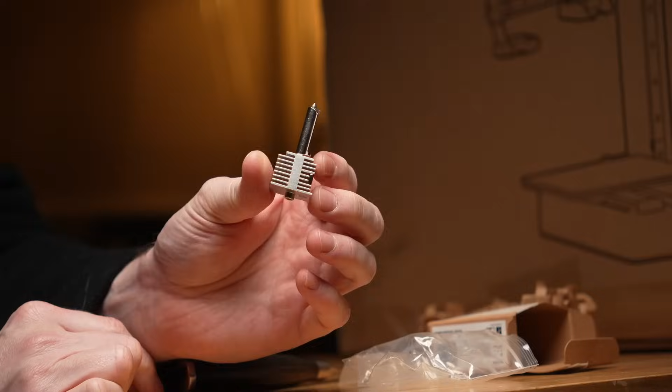All right, well, I finally got to try Bambu Lab 3D printers, and my friends, the hype is real. I'm just going to right off the bat say these printers are amazing. But they're not without some quirks. I have found a couple of things that are a bit weird or cumbersome, but we'll get to that. For the most part, though, this video is going to be an overwhelmingly glowing recommendation from me. These 3D printers are sick.

I just want to throw in here real quick, this video is a bit unusual. It's a first impressions video, but when I recorded it, my intention was to actually not do a first impressions video for these printers and to do sort of a project video, which I began work on and have procrastinated on a lot, if I'm honest. And it's quickly approaching the end of the month here, and I do want to get something out, so I figure we will do first impressions.

Largely the reason I've been procrastinating is because I've been really having a lot of fun doing FDM printing again with these printers, and I've found half a dozen projects around the studio to work on using them, so my time has been eaten up doing that, and I'll share some of those with you here in this video.

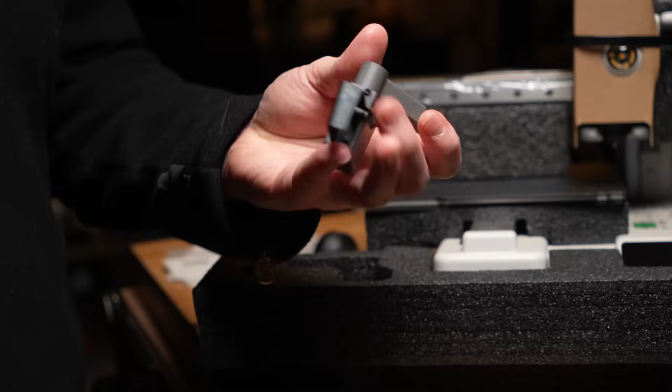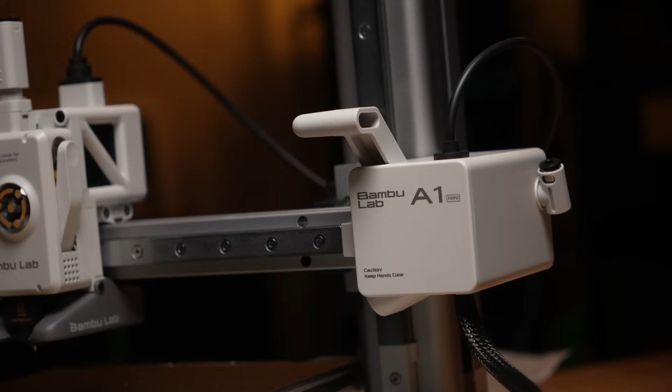All right, let's get into this. So I've got a few printers here. I've got the A1 Mini, and then I've got the A1 and AMS combo.

And for full disclosure purposes, the A1 Mini I bought with my own money. Well, kind of. I used the points system on MakerWorld, and I definitely had some help getting points to do that. So thank you everyone who downloaded some of my models on there, like the fume extraction and stuff like that. That helps me get the A1 Mini for a whole bunch cheaper, which is really cool.

Funny story, actually, the reason I did that is because I had tried to get in contact with Bambu Lab for the longest time, but I could never get through to anyone. So I ended up deciding like, okay, I'll just buy one myself. I don't mind doing that. And then I shit you not, like a week, maybe 2 weeks after I got that thing delivered to my house, an email pops in my inbox from a representative at Bambu Lab, and they were like, hey, we love your channel. We'd love to send you some stuff. And it's just like, you're shitting me.

But okay, cool. So the A1 AMS combo comes from Bambu Lab at no charge to the channel, as well as a stack of filaments. They sent me matte PLAs, they sent me tough PLAs, they sent me TPU, and they didn't send me any PETG, which is my fault. I should have asked for PETG because I actually need PETG for a thing that you'll see later in this video. But I did also buy some matte PLA filament from Bambu Lab as well myself. So it's a bit of a mixed bag.

And as always, I'm not afraid to offend or upset these companies and get ghosted by them. So if I have some criticisms, I'll of course share them with you, and I'll try not to let the fact that I got free shit influence me if I can help it.

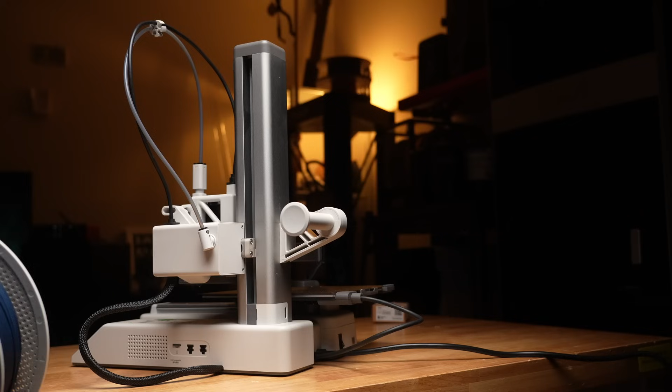So I began with the A1 Mini, getting that thing out of the box, and right away I was super impressed with how well the thing was packaged, and a little bit of assembly is required for all of these printers, but thankfully I didn't find any of it to be too cumbersome or complicated.

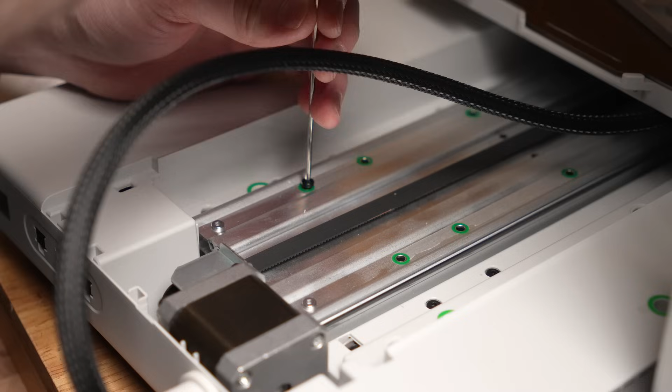But what really stood out to me was just how clearly and concisely Bambu Lab explain all of the different assembly steps. Like on the A1, for example, there's little green stickers that show you exactly where the screw needs to go. So I really enjoyed the documentation from Bambu Lab. I thought that was great.

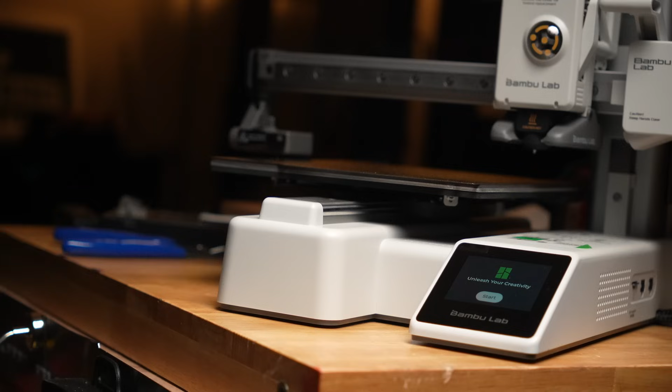And what's cool is that carries through to the software too. And the way I think I would describe it is it's kind of like Bambu Lab hold your hand the entire way. It's almost like they thought of every single possible way that you might fall over, and they've accounted for that. And they are just waiting there to take your hand and pick you up and help you overcome whatever roadblocks you might run into.

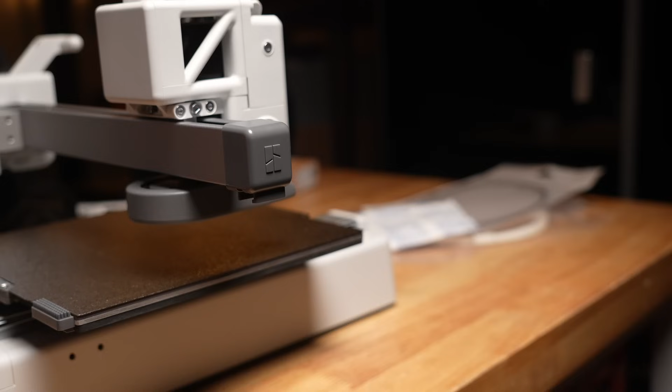There really was only one hiccup when it came to putting together the A1 Mini, and it was purely user error. I do apologize for what you're probably witnessing on screen right now, because this is a disgusting example of user error right here.

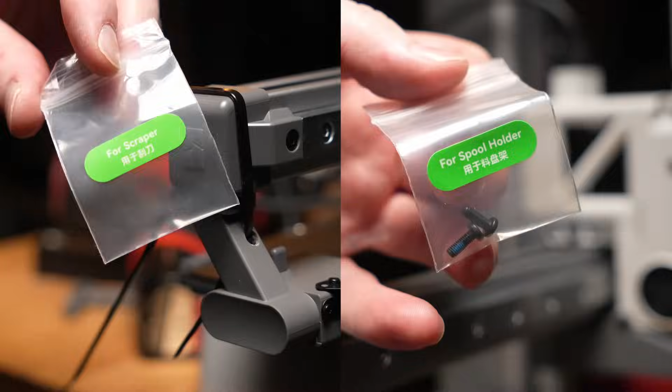In my little parts box there were 2 Ziploc baggies containing different sets of screws. I thought one of those was for this little wiper arm thing that helps purge filament, but the screw I thought was for this thing just wasn't reaching. I looked around making sure I wasn't missing any other screws, and it didn't seem like I was. So I thought I must have just been sent the wrong screw. I had a look through my collection of hardware and found a screw that I thought might work, but that wasn't working either.

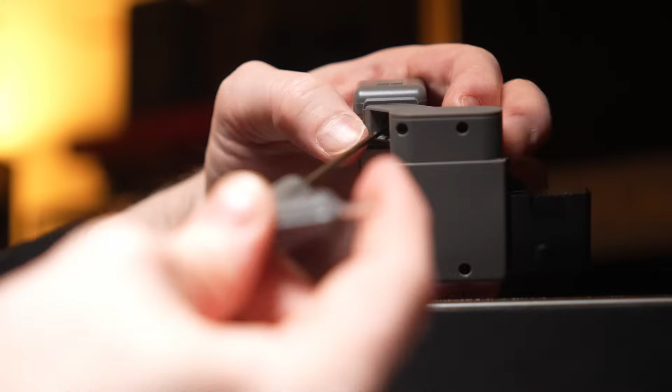I was starting to get frustrated, so please forgive me: I took a drill to this thing. My first thought was I'll just countersink it a little bit, hopefully that'll give enough depth for it to go all the way through. That didn't work. So at that point I was just like, fuck it, and I drilled all the way through the thing and put it on with zip ties.

I'm so sorry, I deserve all the hate for that. Oh, and sure enough, I found the fucking screw on the ground after I'd already done all this. It must have fallen out earlier on and I just missed it.

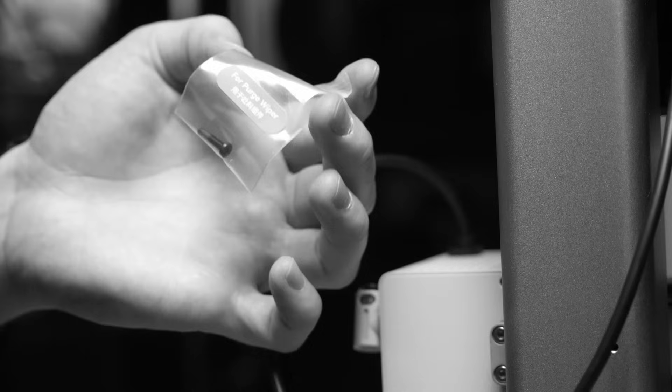So after getting the printer set up, the first thing you do is connect your MakerWorld account, which you can do through the Bambulab app. I've been using MakerWorld for a little while now, initially just to get those points so I could get a cheaper printer. But I've really fallen in love with it as a platform for sharing 3D files. The user experience is really nice, everything seems really well thought out on that website.

But there's one thing about it that always struck me as a bit odd, and I wasn't quite 100% sure what it was for: the community print profiles. It didn't really click until I had the Bambu app loaded on my phone in my hand and connected to an actual Bambulab 3D printer.

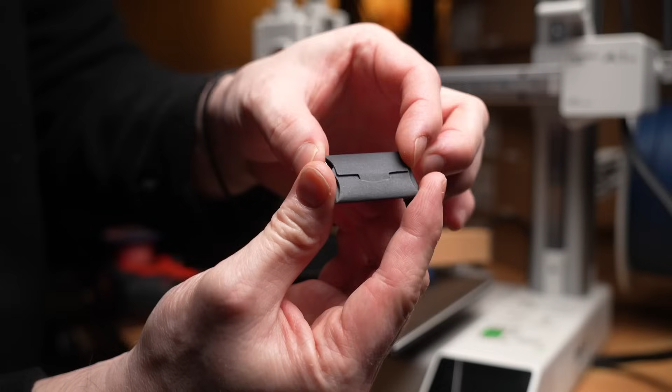The first thing I wanted to print was the scraper, because the Bambulab printers come with this little metal razor blade thing. It's not razor sharp but it's got a decent edge on it, and the idea is you print the handle. That's a fantastic idea for a first print, just to make sure everything is working, I thought. So I went on MakerWorld and typed in scraper, and found the official Bambulab one. And that's when I saw the print profiles, and then it clicked.

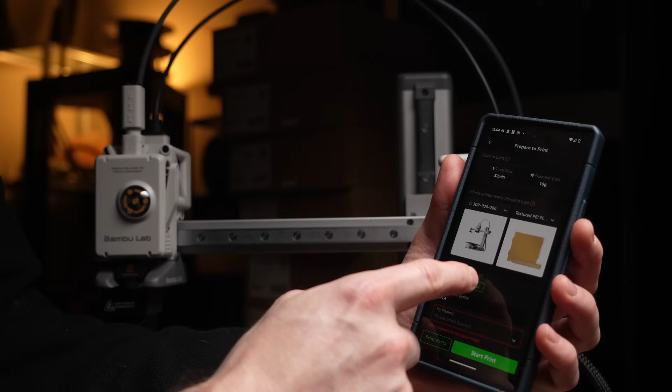I'm like, oh, right, okay, so here's other people who have sliced it up, and they've sliced it up how they want it. Some of them are multi-material, some single material, some have more walls, some have less walls, bottom layers, top layers, different infill settings, and they've shared that to this 3D file on MakerWorld. So as a Bambulab owner, you can just go through these print profiles that other people have shared, choose the one that suits you, and then basically just click print.

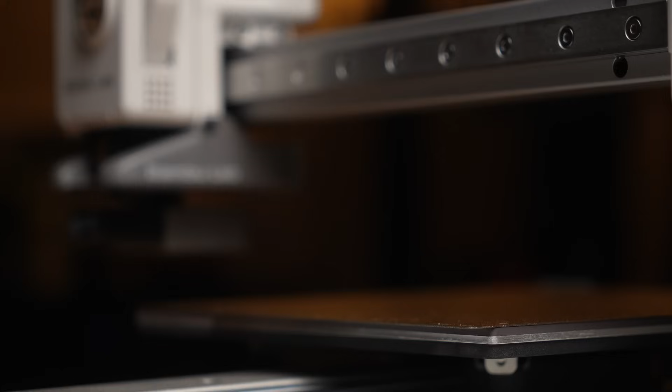It's kind of amazing, and I completely get it now, the whole print profiles thing. I mean, kind of dumb for not getting it, it's in the name, they're print profiles. But experiencing it and getting a feel for it and actually using it is game changing, I think.

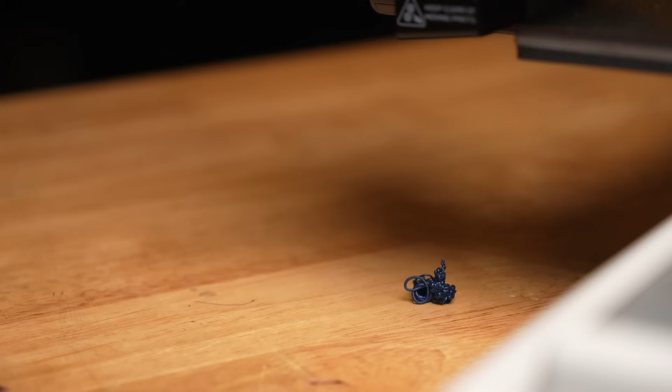From the perspective of someone totally new getting into FDM printing, to be able to just do that, not having to open a slicer on their computer and get potentially overwhelmed by all the settings and stuff, just on the mobile app, picking a thing, picking a print profile and hitting go, it's kind of nuts. So I picked a print profile that didn't use multi-material. I just wanted to get this thing done.

And I think it took about 45, maybe 50 minutes to print, and it's beautiful. The print quality is amazing. I did struggle a bit with the included screws to get it to attach, because the little securing bit on the back ended up delaminating as I tried to screw it in. So then I reprinted that.

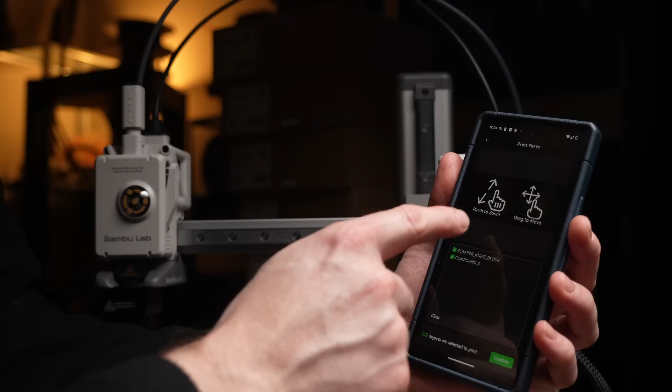Here's a great example of how they've literally thought of everything. I was thinking, okay, I want to print this again using the same community print profile, but I don't want to print the handle, just the little securing piece. I was super happy to see in the app there's a setting called parts, and you just click on that and deselect the parts you don't want and run the print again, which is what I did, and it worked.

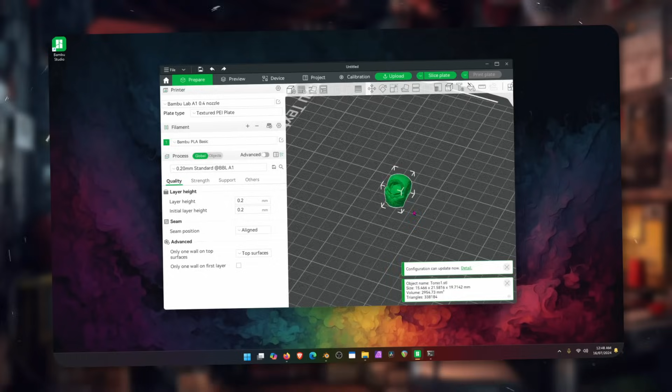So the next thing to talk about would be the slicer. I got to say, I'm really impressed with it. There's not really much to fault it for. Again, it has all this hand-holding built in, which is really great. For example, if you try and start a print and it's set to the wrong printer or wrong nozzle, it'll throw a warning at you. Or if you try to print something that's likely going to fail, it's pretty good at detecting that as well, and it'll say, hey, that's probably not going to work, which is quite good.

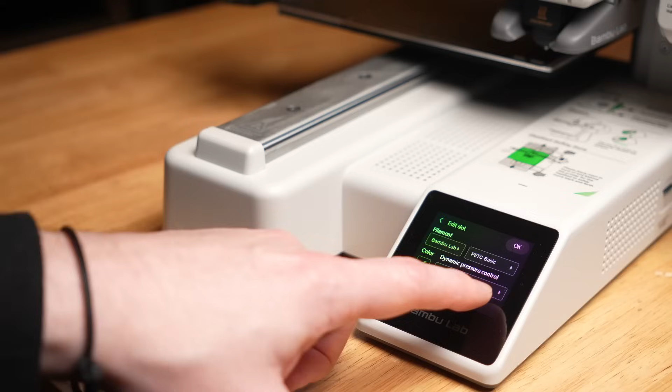But the really mind-blowing thing in the slicer, here's where I think Bambu Lab have really done something excellent, and resin manufacturers could really learn something here. On the printers themselves, when you load a filament, there's actually a bunch of presets built in, and you've of course got your Bambu Lab ones, which is great. So if you've bought Bambu Lab filament, their engineers have spent time creating profiles that work as good as humanly possible with these filaments.

That's amazing. If you want just a drag and drop experience with FDM 3D printing, you buy their filament, put it on their machine, tell the machine that's the filament you're using, and then the machine reports that, I believe, to the slicer. So the slicer knows what material you've got in there, and you just get great print results without having to calibrate settings or tune or know any of that. But what's really amazing is it's not locked down.

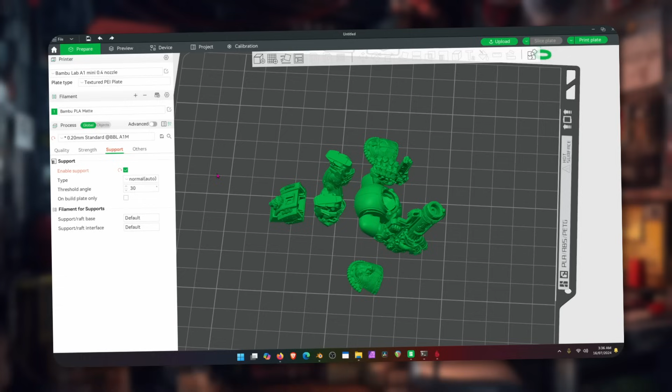You can see they've actually spent time to create profiles for other popular filament brands. This is amazing. eSun's in there, Poly something or other, there's a whole bunch, and that's incredible. Because I personally love eSun, I buy their filament all the time because I can get good deals on it here in Australia compared to all the other ones, at least. It's been a while since I've checked, maybe I should do that. But in any case, I love using eSun filament, and I love that this machine gives me the confidence to just pick the eSun filament I've bought, and then it does the rest.

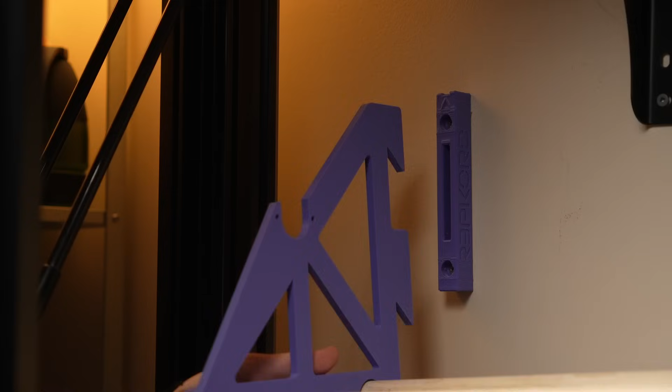Speaking of the print profiles, I've printed a bunch of different stuff. Like I said, I've done PLA, PLA Tough, TPU, and I even did some PETG - I ended up using eSun PETG. And yeah, the print quality on everything has been amazing.

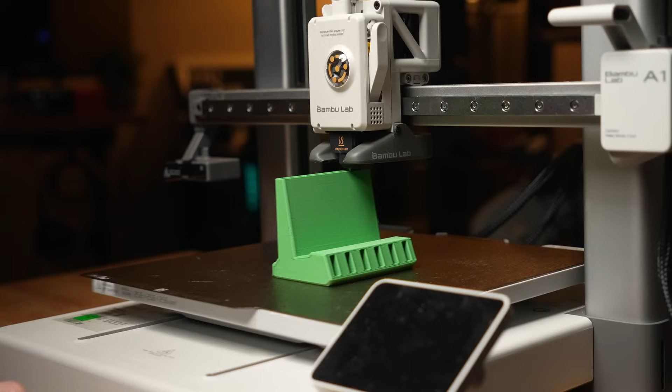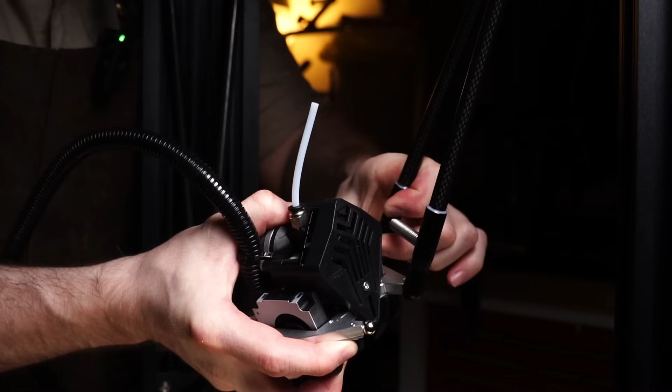And the print times as well aren't too bad. I've noticed, so there's this phone stand I wanted to print that has some USB slots in it, just a little bit of organization for my desk. Using the 0.28mm draft profile for PLA matte, I can actually do it half an hour quicker than my FLSUN V400, which has been my go-to daily driver, just absolutely favorite FDM printer these last however many months since I got it. I've absolutely just been smitten with the V400. It's so good, the print quality is amazing.

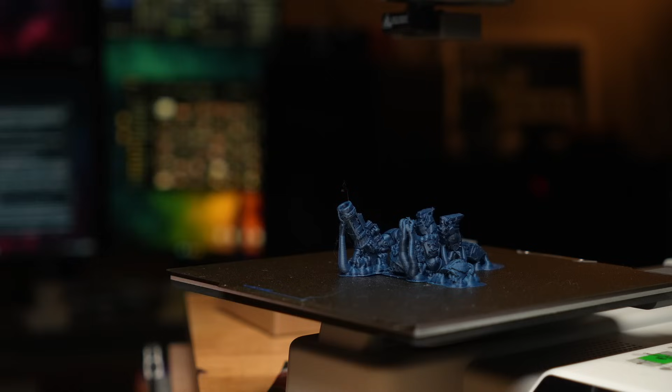It's just so fast. But then here comes this printer doing the exact same thing, and arguably in a more compact, fun size. I hate massive printers. Uniformation just came out with the details of their GK3, and I was so disappointed - like, no, not a big printer. That's just me, I always want smaller printers. I love smaller printers, just the user experience feels like it starts to exponentially get worse the bigger the printer gets. But anyway, thankfully that wasn't the case with the V400 - the V400 is sick. But here comes the A1, and it's the first printer that I feel like, ooh, I might have to kick the V400 now, and the A1 can take its spot because it's just so much more space efficient.

I may be giving these printers away to family. In fact, I think I will, because these are the first printers that I really feel confident giving away to family. That's because of the amount of hand-holding these machines have.

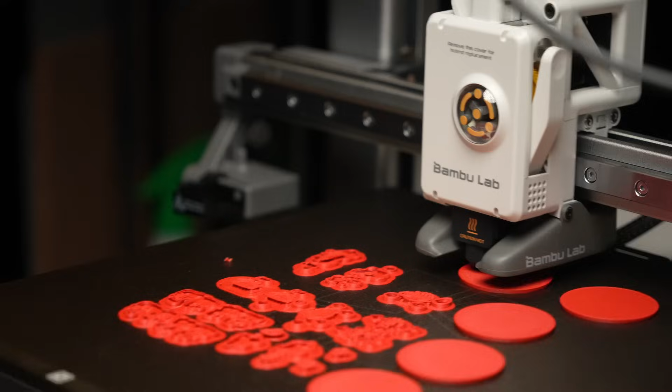These Bambu Lab products clearly haven't been built for people who want to know exactly what all the different settings and features of their 3D printer do. These products are very much more for the person who wants to do 3D printing but has zero interest in actually understanding how the thing works.

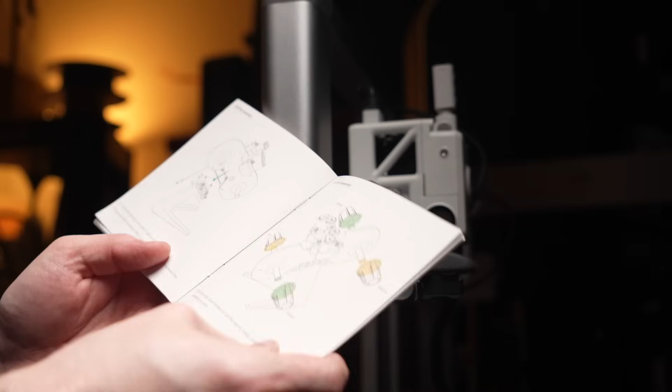I think that's such a great way to introduce people to 3D printing and to share 3D printing with others, especially in concert with that MakerWorld Bambu app. It's just amazing that they've done this.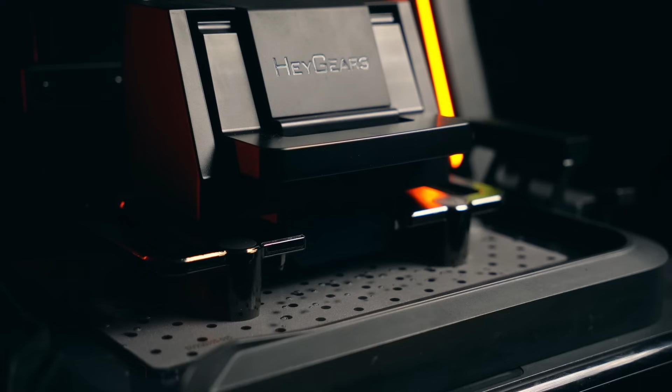They could have done what HeyGears did, and then this would be a completely different video. HeyGears kind of did this with resin printing, but they did it by locking you into their ecosystem. You've got to use HeyGears resin on the HeyGears machine and HeyGears slicer. It's all super locked down and very expensive, which really sucks, because that gives me all sorts of concerns.

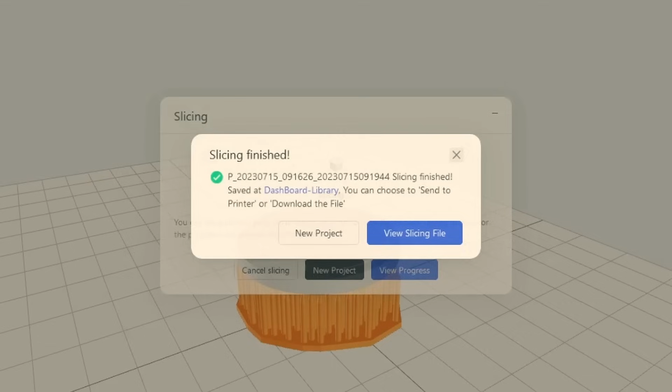Like what happens if their server goes down? Guess you can't use the slicer anymore. Or what happens if they stop shipping their resin to your country? Now you have to somehow get it some other way and it costs a fortune. Or what if they just stop producing the resin you like? Or change their minds about the pricing one day and increase it 400%.

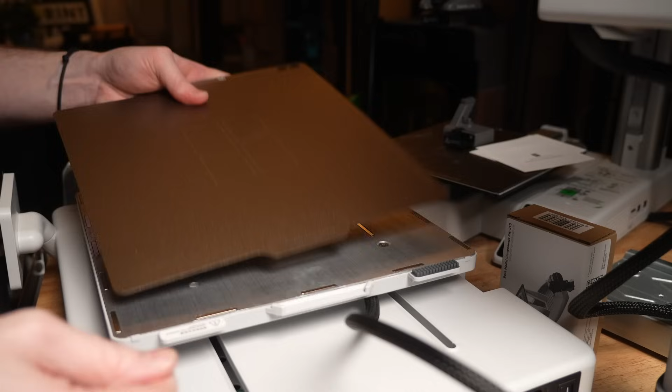I hate that single point of control, like the walled garden thing. Bambu Lab so easily could have been that, but that's not what it is. They've left it open, so they've given you this really beautiful, curated experience that just holds your hand the whole way. I can't think of a better way to put it.

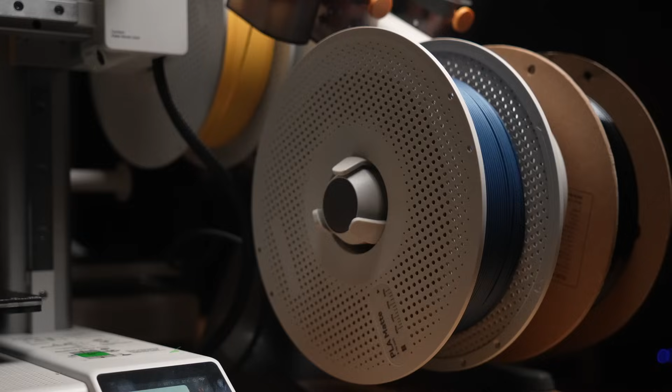It takes care of everything for you, and you can live in that ecosystem if you want. You can buy the Bambu Lab filament. It's really nice. These matte PLA filaments, I'm in love with. They look so good compared to the glossy PLA I'm used to printing with.

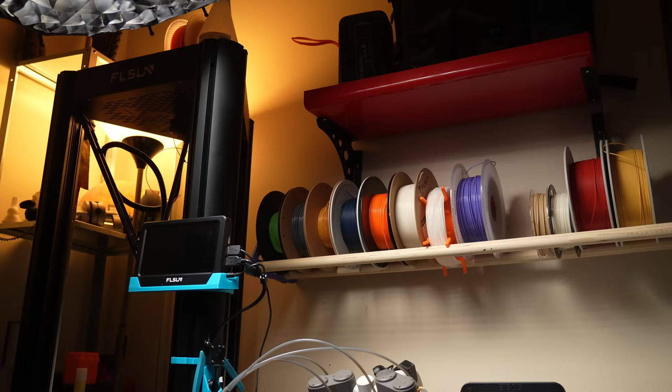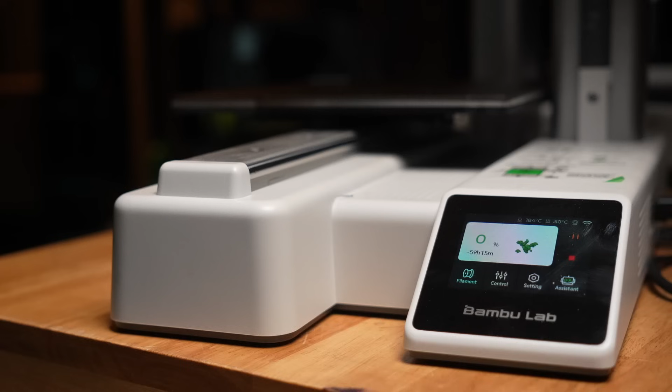But if you want to, you could just happily stroll outside that ecosystem. Go buy some eSun PLA, some Creality PLA or some Overture TPU, whatever it is, and you can use it with this machine. You want to use a different slicer? Go for it. So I think it's that combination of extremely curated, high quality user experience, plus the open-ended, take it as far as you want, do whatever you want with it sort of mindset or ecosystem. And I'm smitten with it.

Okay, so let's break these printers down a little bit more, and we'll talk about the AMS too.

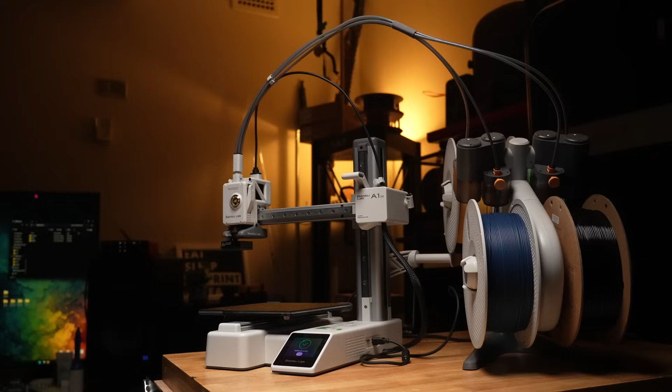The A1 Mini, holy shit, if this isn't the most perfect first FDM printer for someone, I don't know what is. Even for kids. I've got some nieces and nephews, and I know exactly where this printer is going, and I think they are going to get a lot out of it. But also, if you're just limited on space and want to try out 3D printing without the thing taking up a ton of room, just get the A1 Mini.

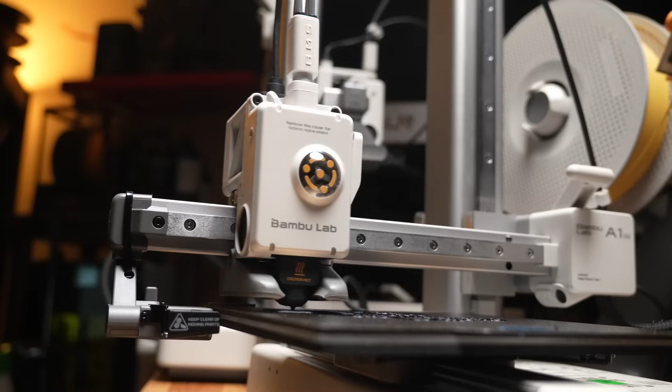This thing is sick. Just because it's smaller, it's in no way less feature rich. It's got all the same bells and whistles. It's a zippy little printer. It's got all the intelligence of its big brother, the A1.

This blew my mind. They have filament cutters built into the tool head, which is crazy. They're able to trim the filament themselves and then move the print head over to the side, and then they have a little purge arm thingy where they excrete a little filament poop and knock it off to the side. So yeah, A1 Mini, incredible deal.

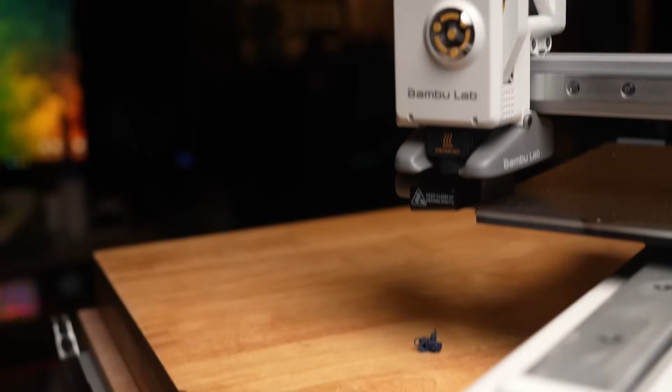And then the A1 is if you've got a bit more space and want to print slightly larger stuff. The A1, in my opinion, is like the perfect print volume. It must cover like 99% of the stuff I've ever FDM printed. When I do FDM printing, it's mostly practical, useful stuff around the house. More and more lately, it's ways to optimize the studio, make it more efficient, more practical.

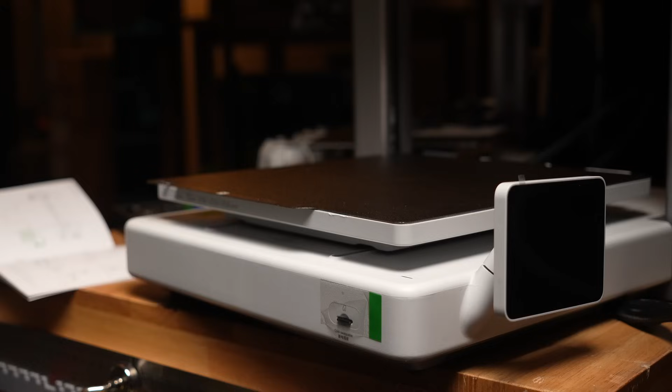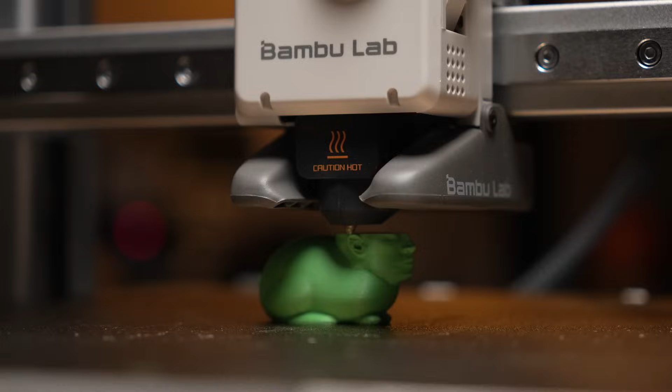It's so rare to need a printer larger than this. In fact, there's only one thing I've tried printing that really needs a larger printer, and that's for an absolutely ridiculous idea of a video that's been in the works and is kind of dead in the water because having a bigger printer is just more problems. Also, the way I was trying to use it is more problems. But anyway, I'm getting off track.

By the way, how are you finding this style of first impressions video, where rather than me reacting in real time and sharing my thoughts on a printer, I'm sort of retroactively doing it? Be keen to know.

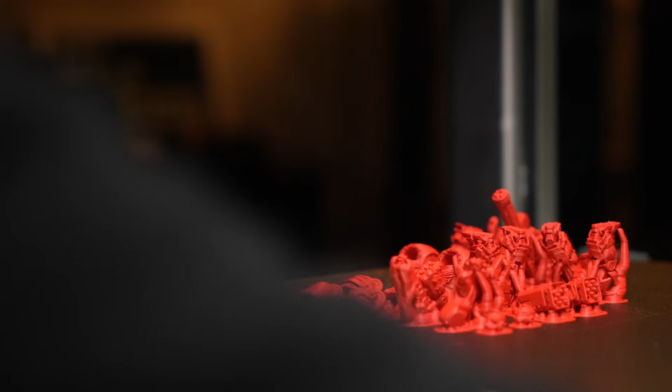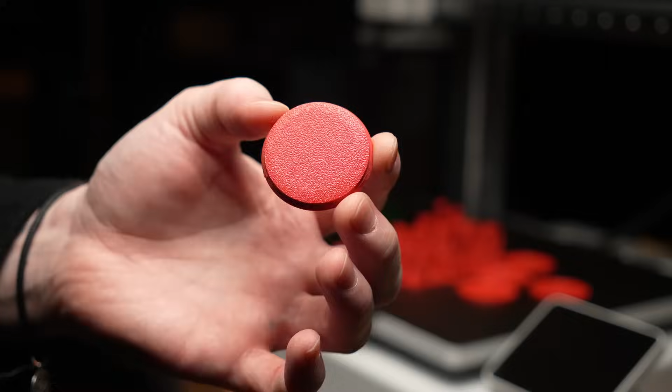I should talk about some print results real quick. There's going to be more details on these in the follow-up video, but here I just want to mention that overall I'm completely happy with the print quality I'm getting off of these machines. But I noticed one weird thing, and it's kind of like elephant's foot, but it's not - I don't know. I'd be keen to hear from anyone watching who's had the same thing with their printers and figured out what it was. I haven't spent any time trying to figure this out, but I noticed it and thought it's weird.

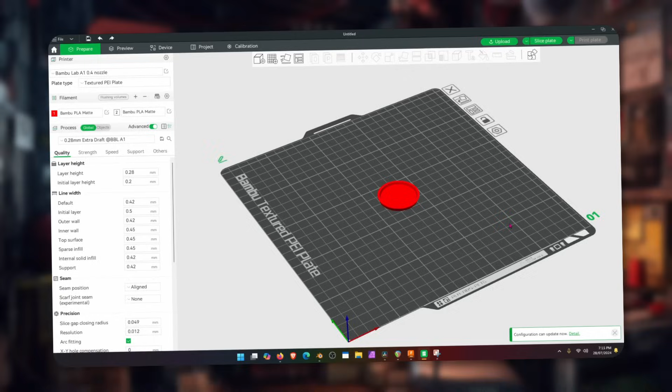These bases from my base pack that I printed - it looks like the first 10 layers or so print at one angle, and then all of a sudden it drastically changes and becomes a much steeper angle, when that whole face around the edge of the base should be the same angle. That's super weird. I don't know what that's about, but I didn't notice the same problem on any of the other models printed. So yeah, that's a weird one.

I played around with a ton of different print profiles. They're all fantastic - that's got to be the biggest selling point for these printers, really, is just the included print profiles, because it means I don't have to tune anything.

I went through and tried a bunch of different print profiles, and I even changed the nozzle on the A1 Mini. Both of these printers use the same print head - they're identical, so they both have the same procedure for changing out a nozzle, and this absolutely blew my mind. It was completely toolless - you just pop the cover off, and then there's a little clamp thingy, and the nozzle just comes right out. Absolutely insane, so easy.

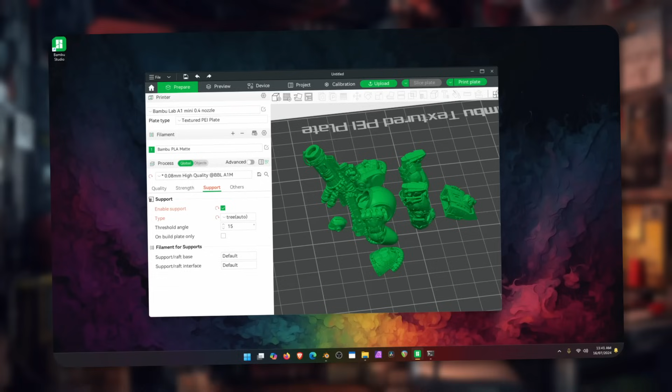I was so impressed. All I did after that was run the automatic calibration thing from the settings—just a couple of taps. Then on the computer, I told it I changed the nozzle to a 0.2, and that was it. As for whether you should bother with a 0.2 nozzle, I'll leave that for the next video.

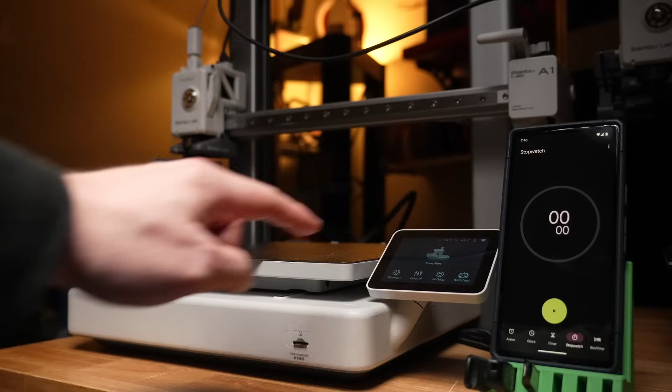One final weird, maybe undesirable trait of these printers before we get into the AMS: despite being quite snappy and speedy, I can't help but feel like they're very slow, simply because they take forever to actually start printing when you send a job. They have a whole pre-print calibration process before they're happy to start. You can disable a bunch of that—I don't know if you can disable even more—but it doesn't seem to help. It still feels like it takes a long time.

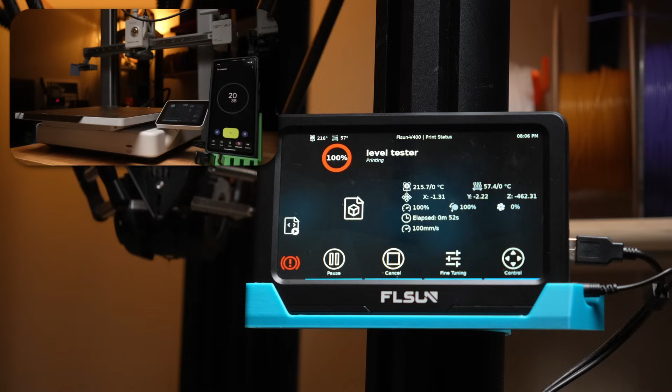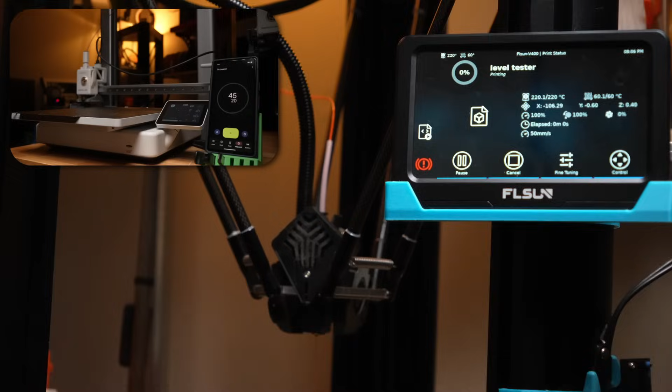This is maybe one of two things my current favorite printer, the V400, does better. I can send a job to the V400 and straight away it springs to life and starts printing—it's amazing. Especially if I'm keeping it at temperature, I can quickly iterate on a design, send a part to it, it starts printing, and then the print ends. I can quickly tell it to keep itself hot, I'll be back in a second, then try the part. If it's not good and I need to make a small change, I can quickly make the change, send it to the printer—click, click—and straight away it's printing again. That is so satisfying, and it really helps the whole workflow of rapidly prototyping something feel really speedy. It makes you feel really connected with the machine.

That is sadly missing here with these Bambu Lab printers. I did try disabling as much of this stuff as I could to hopefully get it to behave the same way, but for whatever reason, it just still takes so long to start printing, which sucks. But then once it is printing, it's nice and fast.

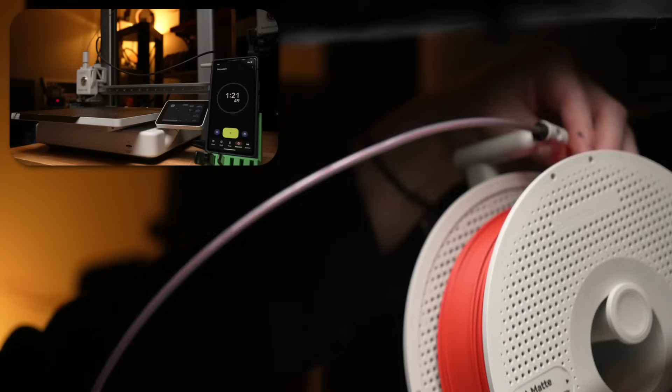So there is that. Now, the other thing that is slightly annoying is it uses one of these PTFE tubes to go from the filament to the print head. I personally dislike this a lot because you have to feed it through, pushing it a little bit at a time, and then the spool does whatever the spool wants to do. So just a minor grievance there—I prefer not to have that. In fact, I may just omit it from mine, and I think that will be fine.

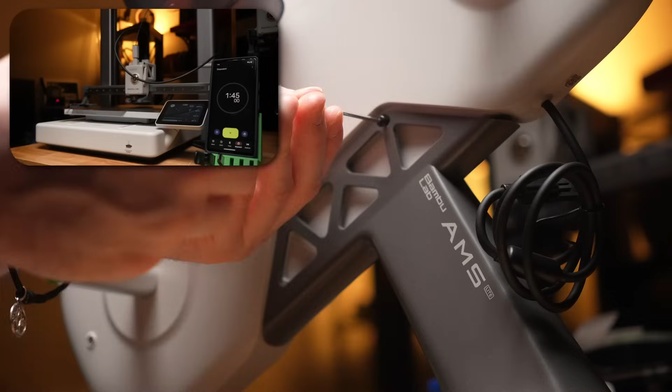Let's talk about the AMS now. It was relatively easy to set up, get plugged in and connected—no complaints there. Something really cool is that when you load Bambu filaments, it can automatically detect what they are, I guess from the labels, and the slicer then reflected the filaments I'd loaded. That was insane to me.

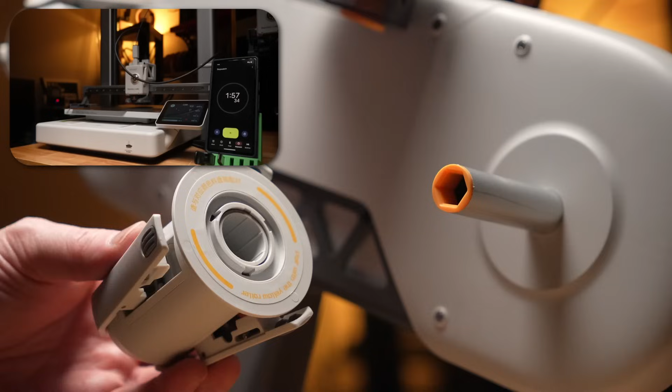Unfortunately, you can't print TPU with the AMS, which is annoying, so I had to disconnect one of those little hoses—the PTFE tube—to print with TPU. That was a little bit annoying, but the fact that this thing has a pretty good TPU profile is great, because TPU has been giving me so many headaches this year. I'm not going to get into it this video, but I will at some point—there's a TPU project that's absolutely killing my life, but we'll get there.

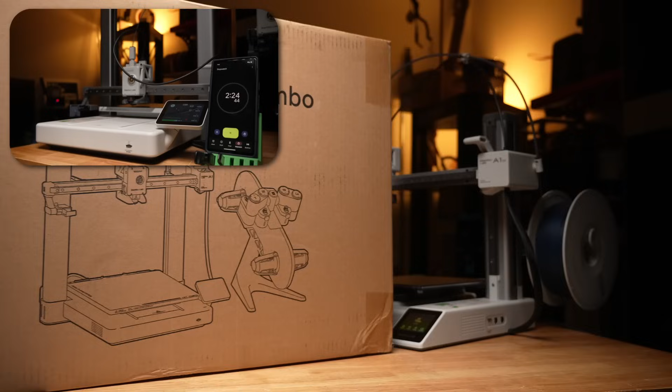I was going into the AMS with a lot of bias that I'm going to hate it, and I've got a few reasons for that. One, I think it's just going to take up too much space, because you've already got the footprint of the printer, and now you're effectively doubling that by adding this filament system. For someone who's extremely limited on space, I don't love that. Another significant detractor is just how much it can potentially increase print times by.

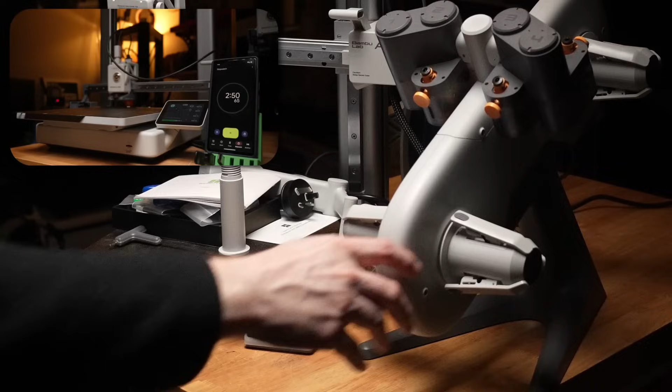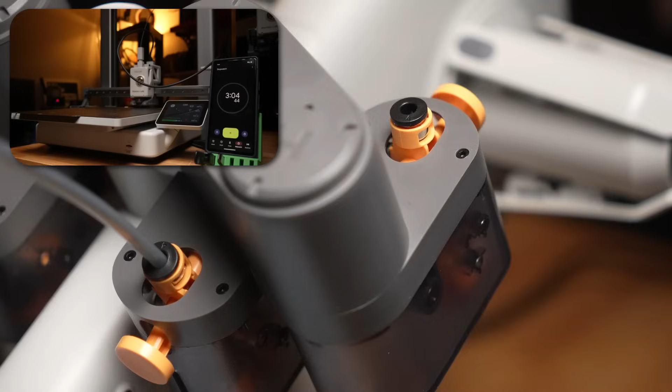If the majority of your layers have more than a couple of materials in it, then each of those layers is going to take forever while the printer swaps over filaments. You can reduce the time a bit by turning off the purge tower, maybe a couple other things I'm not aware of yet, but it still takes a hell of a lot of time.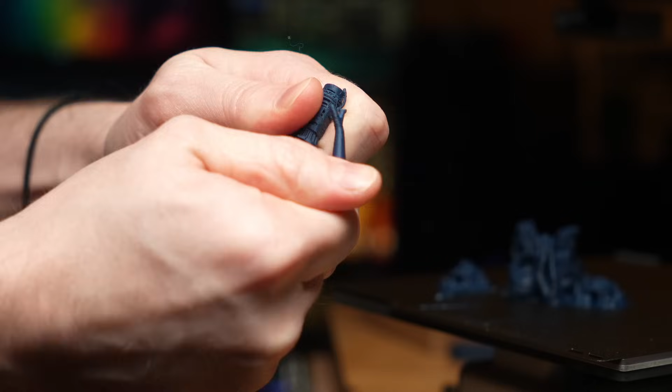But yeah, using a different material as a support material to print a single Terminator increased the print time from like 9 hours to 60 hours, which is just absolutely absurd.

And I did send it. I was like, yeah, fuck it. You know, I'm here, I'm making a video about printing miniatures—let's do it. We'll send it and see what happens.

And my God, so I had to baby this print basically for 2 days, because spoiler alert, it didn't succeed—we didn't get the final day in. Because what was happening was so weird.

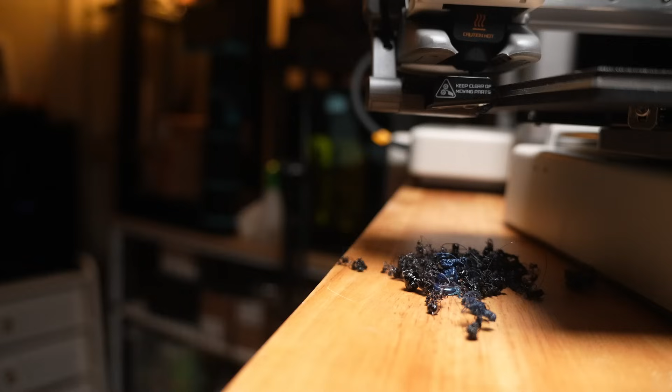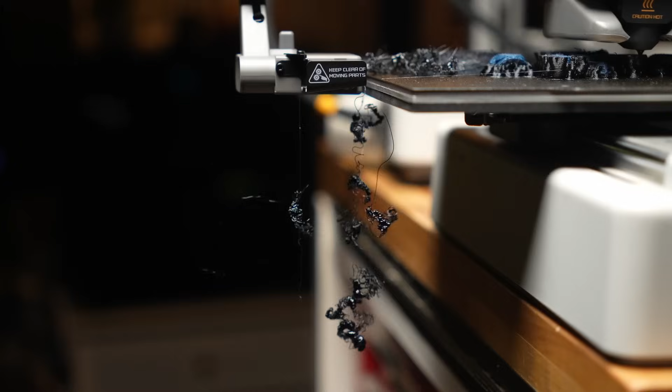The little purge wiper thingy—the printhead would come park itself correctly, extrude some filament and create a little poop, and then the little poop arm would swipe itself across to remove the poop, but the poop was getting flipped over across the other side and ending up on the bed. Hopefully I've got some good footage so I can show you exactly what a mess this was creating. I think this is a result of the PETG, because PETG is like mozzarella—it's particularly stringy. So that was super unfortunate.

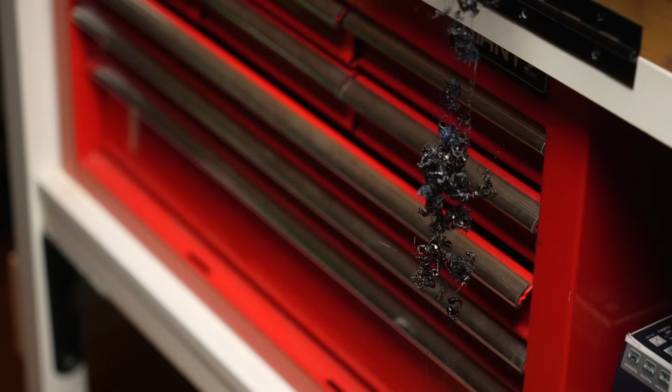Eventually this did end up making the print fail, and that was when I was sleeping, because I couldn't baby it the whole time. 60 hours, that would have been a heroic commitment, and yeah, it's not one I wanted to make. So that was a terrible experience. I will say though, for the parts that I do have, the PETG did pull away really nicely and left a good surface on the parts. So it works, but my God, fuck that, no way.

I think where the AMS really is going to shine is only a very few specific use cases. So if you like printing inlays, which is something I do enjoy doing, and I printed these speaker stands because I just got this new desk.

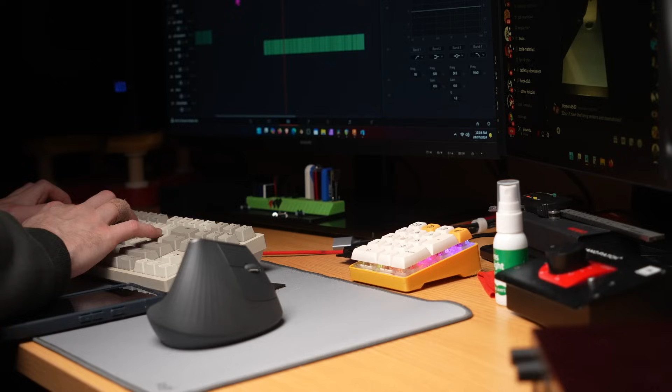It's so good, I didn't think I would like it as much as I do, but the first day of having it, I was overshooting something with the camera, then I pulled the SD card, walked over to the desk, plugged it in, and I went, oh, I get it. Because I didn't have to sit down and pull in my chair and then plug in the SD card—no, I just walked over to the desk, plugged it in, and was instantly copying across my files, then I could just turn around and go back to the workbench. So really impressed with this.

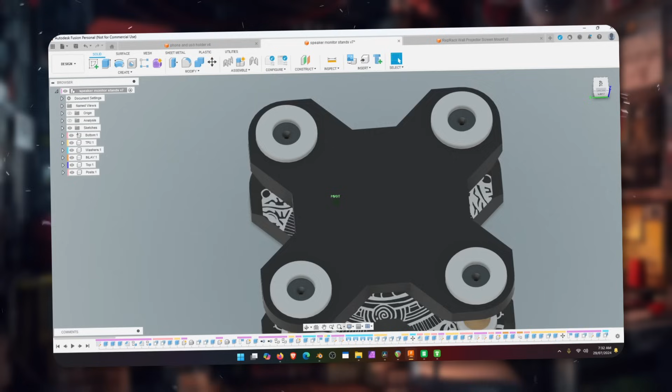I was like, I'm not going to pay that, I'm just going to DIY my own. So I'll put these on MakerWorld as well, so you can go get them if you want to. It literally just uses some 25mm dowels.

This is actually a broom handle. Yeah, TPU inserts, and then PLA, or you print it in PETG or whatever you want for the rest of it. They are working super nice, I must say, and they look pretty cool.

Oh, but I can't share the design, unfortunately. So the one that I upload to MakerWorld won't have the inlay in it, just because it's artwork that belongs to a friend of mine, and I don't have the rights to do that. So I'm not going to do that.

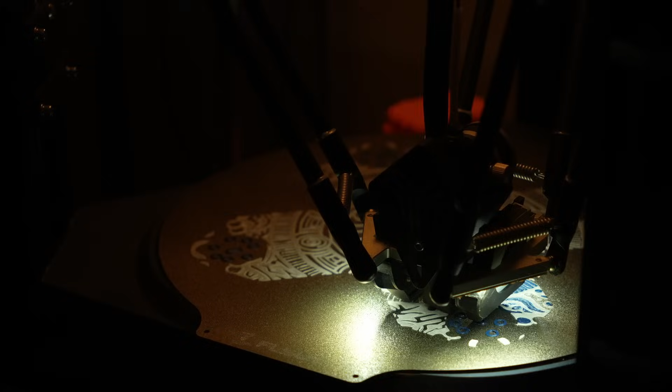So anyway, inlays. I love doing them, and I do them a decent amount, but I don't think I do them enough to the point that I've ever felt like it's a problem that has to be solved by some piece of hardware or tool. Because honestly, to set these up is incredibly simple. It is not hard at all to do. So I've never minded doing it.

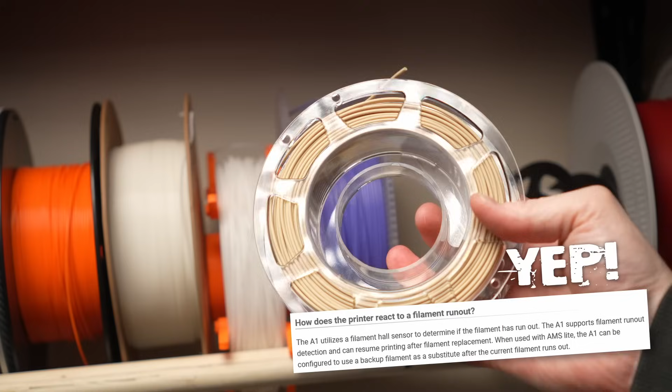Another advantage, I guess, would be if you wanted to print something absolutely enormous, that's going to take more than one spool of filament, and you want to make sure it can automatically take up another spool once the first one runs out. I got to double check, but I'm pretty sure both A1 and A1 Mini are capable of filament runout detection without the AMS. So even without the AMS, if you had a giant print, it would just pause and wait for you to add more filament if it came to it.

But yeah, it's another thing you could just automate if you wanted to. But again, in my experience, that's something that's so rarely going to come up. Is it worth the extra space and the extra cost? Me personally, I don't think so. And I FDM print quite a bit. I really do. I love FDM printing, but less so for tabletop gaming stuff, at least lately.

Lately, it's been more just practical, useful stuff, like this filament holder. How cool is that? These are printed in Bambulab PLA Tough. And yeah, the print profile, of course, is great. They look amazing, they printed in decent time, and they work really well.

So, all right, final thoughts. I bloody recommend these printers. If you are interested in getting into FDM printing, God, it's a no-brainer. Just buy an A1. Or if you don't want to invest as much and you also want it to take up less room, A1 Mini. These printers are glorious, truly.